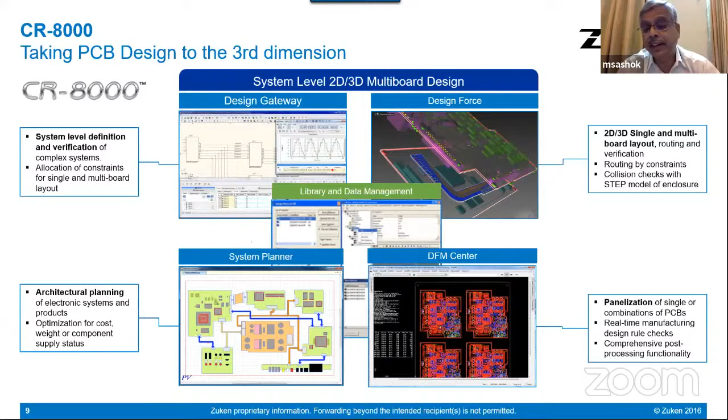So the electrical side family is called the E3 series. E3 series is more from an electrical perspective, interconnect of cables and wires within the system.

Here again, we have the tool giving you the authoring capability to create circuit diagrams, make production documentation, customer documentation, installation and service documents. From the circuit designs, we go into making other views of the schematic, including creating wiring diagrams, which basically says these are the bundles of wires which will go through and therefore form the cables.

Then based on the kind of signals and requirements within the system, you can put in other details to the cable information. To give you a reason why cabling design and wire harness design is very important, I will show you some pictures in the subsequent slides.

Just to bring that into perspective, a typical high-end automobile, for instance if you take BMW 3 Series, if I'm not wrong, if you were to lay out all the wires in the car end to end, you would have close to 5 kilometers of wiring. So you see, this level of wires to be handled necessarily requires a good tool, which allows you to set up a proper schematic and proper layout and do the cabling.

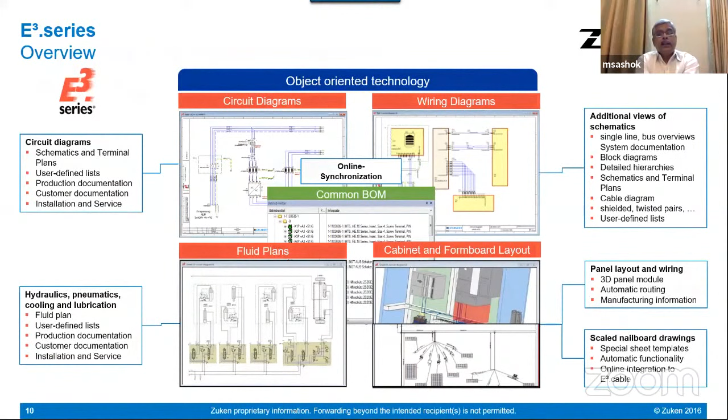And finally, of course, the fact is that there's a lot of data now. When you're doing a design of a product, invariably, if you take automobiles for instance, you go into an automobile showroom and take a look at the model that he has. You go into a Maruti showroom and say, I want to take a look at Alto. And he will say there are 4 variants to the Alto, right? You find yourself with a lot of options and variants.

And so you have petrol, diesel, you have something with additional bells and whistles, like something comes with 6 airbags, the entry model doesn't come with airbags. Obviously with each option and variant, at the back end, a lot of the electrical activity, the electrical connections, and also the PCBs or the ECUs which run inside the car would also be different. And each of them calls for its own set of drawings, its own set of manufacturing information and servicing information, and so on and so forth. Very quickly, any product lands up having enormous amounts of data.

So what we recognized is that good engineering data management is key to a successful way of not only designing and producing, but also managing the life cycle of the product. So we have a solution called DS-2, which in particular for PCB is called DSCR, and for the electrical side it's called DSE3. Here we manage the component library, we manage design data in terms of good version control.

So we at Zuken are focused on providing, or what we say, empowering the designer. Designers, as they keep pushing the boundaries of their design and physical realization of the product, come back and pose the challenges to us.

So there are areas of work which we do that are essentially meant to empower the electrical and electronic engineer. With authoring tools, as we've been going forward over the years, we've seen the form factor of so many elements or systems becoming smaller and smaller. Just take the case of the mobile phone - even going back as late as 3 years ago compared to what you see today, it has seen enormous change in form factor, size, and fit. So there's been a lot of activity in how we provide our tools for authoring.

We have more design domain data management requirements coming up. Today the world works not just in one place - it's geographically spread out. You may be part of a design team sitting here in Bangalore, working along with a team in Pune, connected to a team in China, all managed by somebody sitting in Germany.

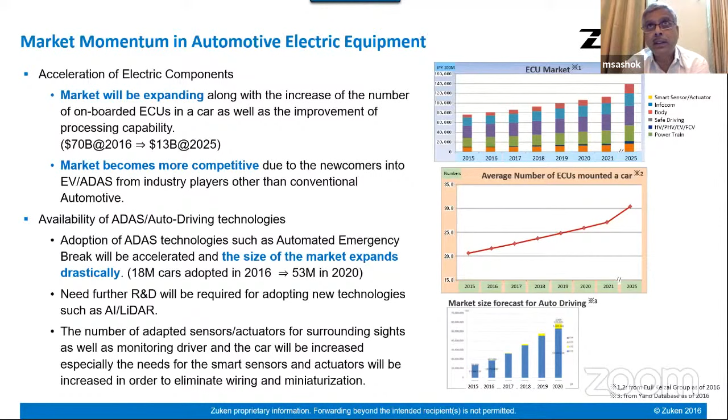As of today, if you see, the EV market itself is very crowded, depending on the size of the vehicle to the electrical mileage range. In the past, there were very few, but today it's already looking like a crowded market, and everybody is still working to improve.

So there is a lot of activity happening on the automotive side, and the most interesting changes are that software companies are becoming car manufacturers. Google has a car project, one of the most well-known projects going on - in fact, they do a lot of work out of India on this car project. So it's not just the standard traditional automotive companies, but other companies who are also actively engaged in automotive, especially the EV boom.

There are some very specific characteristics required for automotive electric equipment. You have a lot of variants. Today's cars are looking at miniaturization and power saving on the platform. There is a lot of focus on safety and reliability, with safety regulations like ISO 26262 bringing in a lot of focus on safety, ensuring the car design is inherently safe. This also requires designers and manufacturers to have traceability and provide evidence that they have designed it well and tested it well.

You might recall that two years ago, Volkswagen got into trouble regarding exhaust emissions. How did they get caught? Because there is a requirement of traceability and evidencing, and somewhere in that process, if you try to cheat the system, you get caught. So the whole process is now being driven worldwide with a lot of focus on safety and reliability with traceability and evidencing.

Also, we are moving towards a lot of automated driving. We have electric vehicles and a lot of focus on autonomous driving vehicles, which brings into focus high-speed designs, both for safety reasons, since we don't want an automatic car to just stop halfway on the road. So there are a lot of requirements for high-speed activities. These are some of the broader characteristics of automotive electric equipment today.

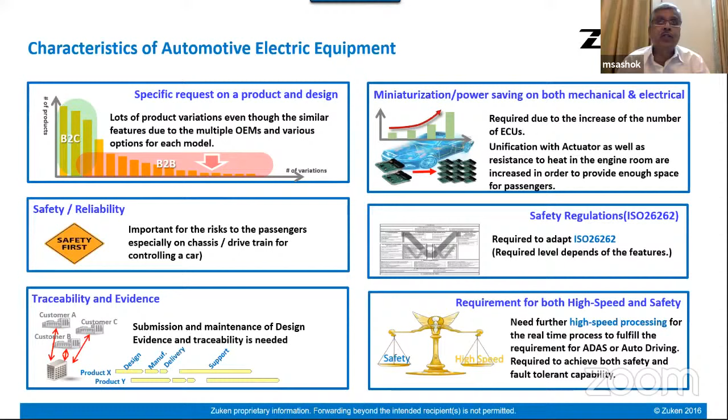I will very quickly place this whole thing in front. There are a lot of design issues which come up from conceptual design, going through circuit, PCB and wiring, creating proto evaluations, and going for mass production. As you can see, the entire concept to realization has a lot of major issues.

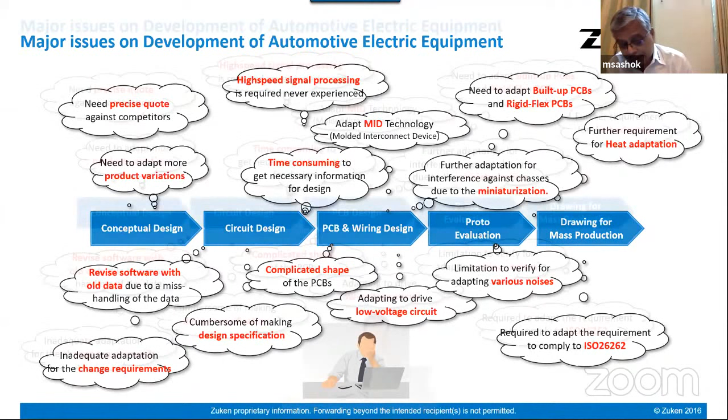In this process, you need to be able to manage the entire approach using a good set of tools. Broadly, this whole landscape can be broken down into three areas. One is everything to do with the design scheme. The other is how you go ahead to design and evaluate different technologies. And finally, data management is very key to the whole aspect of it. These are some of the major issues in development, and Zuken provides solutions for that.

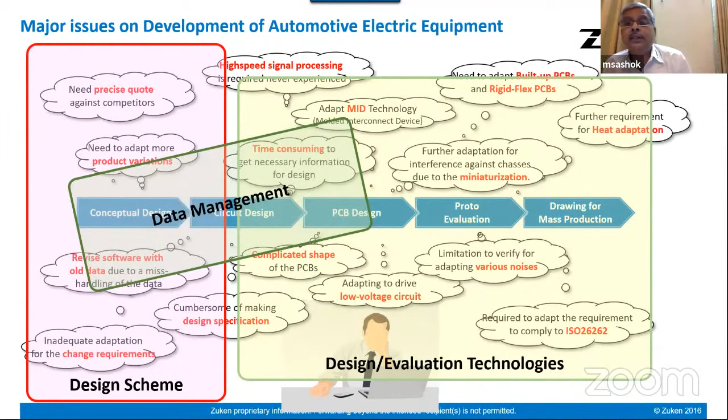Hello, I seem to have lost... No, we're still here. Oh okay, sorry. My screen suddenly went blank. Okay, I'm back, yes, alright.

Not only are there issues related to the electrical and electronic side, but we also have mechanical design challenges, in addition to the electrical electronics. So electromagnetic performance, strength and stiffness, thermal, durability, noise, and gearbox. All these, in sum total, give you the picture of the necessity to have good tools for you to handle the design process.

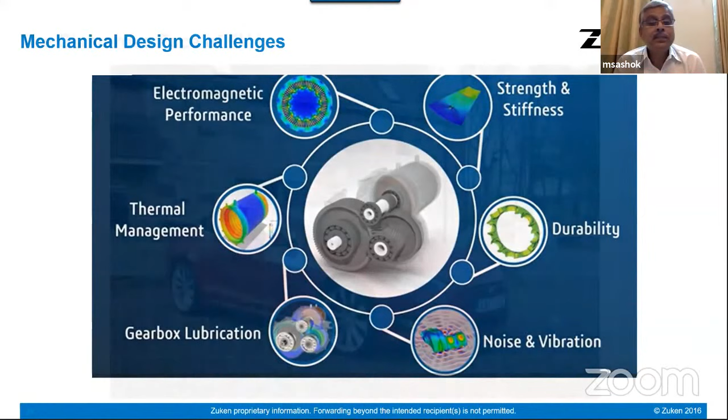To give you another perspective, I'm quite certain everybody recognizes this. This is the most glamorous side of the electric vehicle family - this is the Tesla. I've had the good opportunity to actually sit in it and drive. It's an excellent vehicle and phenomenal engineering. Interestingly, from a perspective of cable and wire harnessing, it looks so sleek and nice.

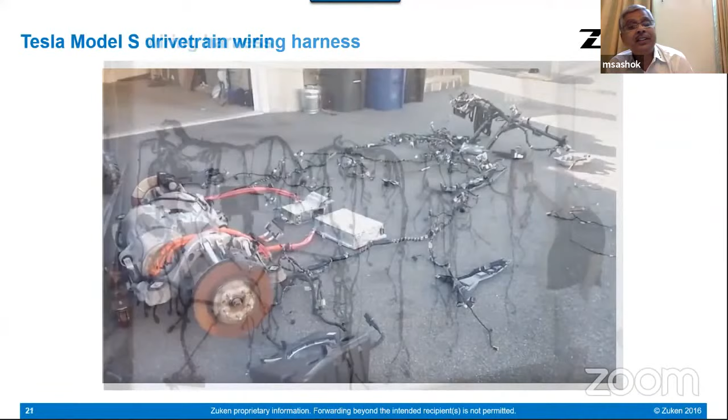If you see the next slide, that shows you the innards of the wiring of the drivetrain for Model S. As you can recognize, what looks so nice and sexy outside, the innards are quite complex. There is a lot of cable and wiring, and it goes all over the vehicle. The next slide will give you another view of the complexity of the Model S wiring harness. So this is the kind of wiring which goes inside a vehicle, and this is Tesla, an electric vehicle.

As you can see, there is a level of complexity involved in not only visualizing this whole wiring system in conjunction with the overall system itself, the mechanicals, but also the entire manner in which you're going to produce this. Don't forget that there are companies who produce a million cars a year of a particular model, and the ability to manage that requires you to use good tools and processes which help you do this accurately, all the time.

All right, so this is where it starts to get interesting. At this point in time, I'd like to hand over to my colleague Ramakrishna, our application engineering manager, who will now take you through how we manage this when we have to design and physically produce a structure like this. So Ramakrishna, over to you.

Yes, thank you very much, sir. Yes, as we move across, we talk about empowering the engineering with Zuken design tools. Could you just turn on your camera, please? It was on, I think. Yeah, the camera is on. We can see you, it's on, right? Yes, confirm. Okay, thank you.

To start with, to automate the harness design flow, these slides explain the entire flow from the electrical drawing to the harness drawing, and finally to the manufacturer for producing the harness.

A typical part may have a top level, a functional or topology drawing, as we see on the left side of a sample car drawing, and a detailed electrical scheme, which constitute the electrical circuit diagrams. From here, once we have those, we move to the 3D environment, any MCAD.

So either we take NX, CATIA, SolidWorks, Creo, Solid Edge—all the standard MCAD software available in the market—so that data can be transferred into the MCAD for mechatronics integration and design. Once we have that data inside the MCAD, we perform other activities, and then using Zuken-specific tools, we automatically create those harness drawings.

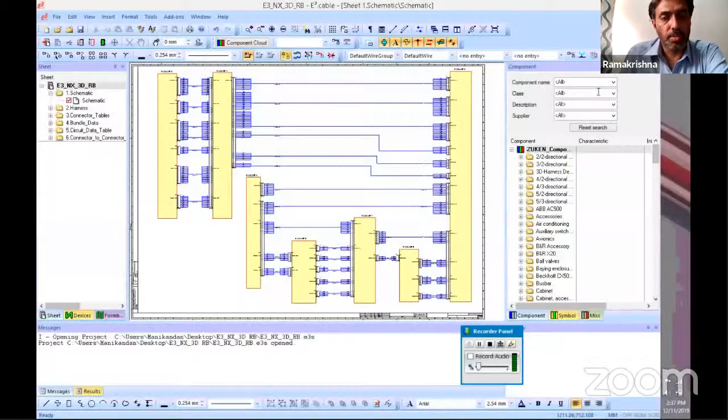So in case if there is any, this is how the electrical software E3 works. We have different types of schematics with lots of interconnections, and I'm talking about bridging the data. So we export the data, selecting the suitable MCAD software available for us.

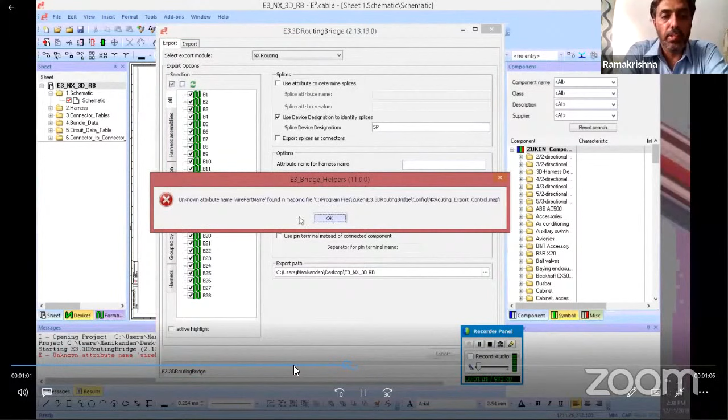Then select this data and export the XML file which goes into the devices. When you use splices, we run through the recognition of the splices in the tool and export the data. The data is exported and the PLM XML file is being created.

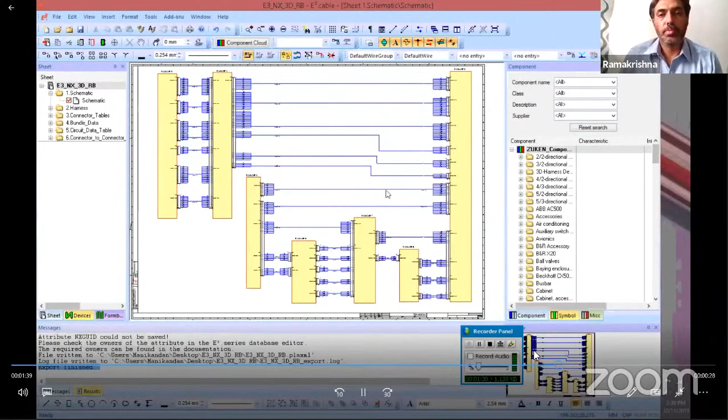So I just wait here by the time it exports the data. Yes, so we have this XML file being exported.

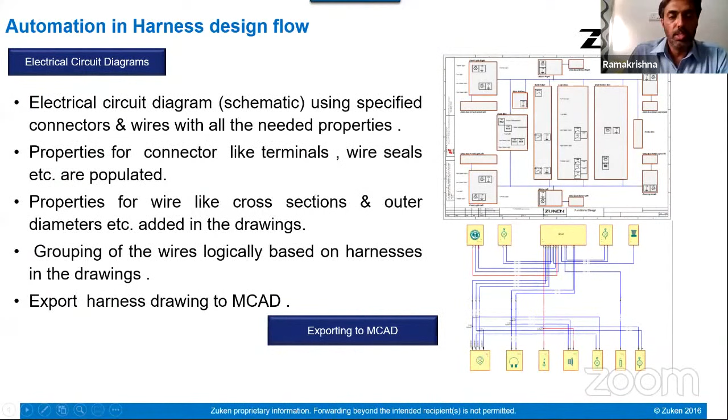So once we have this exported MCAD file into the MCAD tools, we talk about transferring this data for the mechatronics integration. That means we pass the data into the MCAD tool. The XML file prepared, generated from the E3 ECAD tool, is imported into the MCAD.

What all parameters go inside are the connectors, the wires, the cables, the connectivity information. Based on the position of units, the connectors, and parameters like collision, mobile parts, weights, and center of gravity, the routing paths are defined in the MCAD. Once these routing paths are defined, the routing is performed in the MCAD.

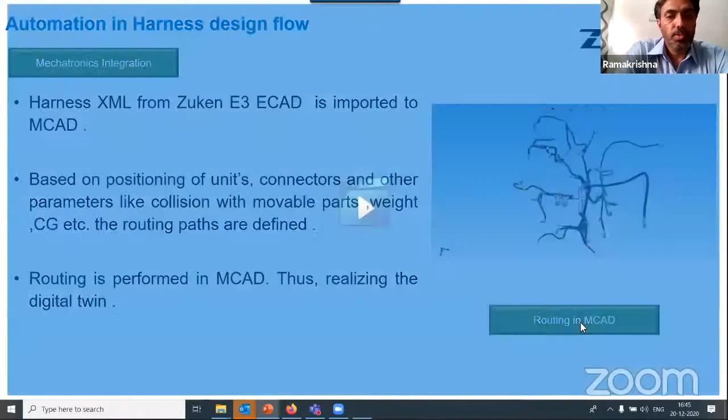So that's what we are going to do, realizing the digital twin over here. I just wish to play a video where we have a specific harness with all those connectors in our tool.

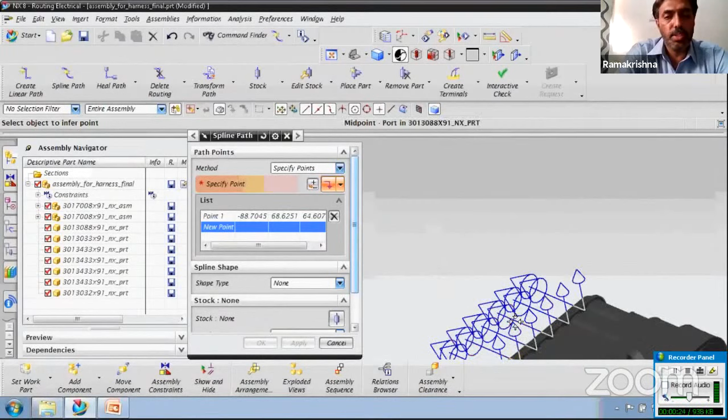So once this is in an MCAD tool in which we are transferred the data XML file, we are further putting on the spline paths or the different parts in which we are going to do the routing points over here. So the routing points are being defined.

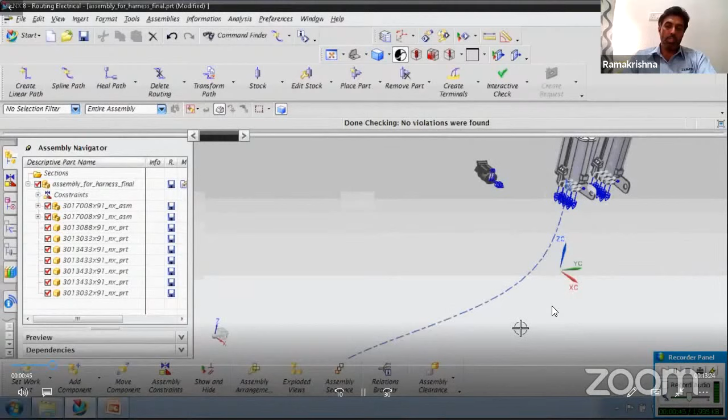So with all the way we wish to do that, and with all those parts and any collisions which we wish to take care of, where routing should not happen in specific areas of the car, all these parameters are considered and provide those routing paths.

Probably, for the ease of this thing, I'll just move through the slides to a faster extent.

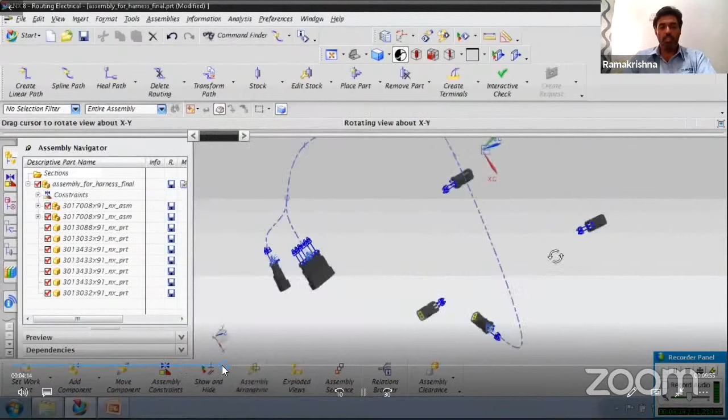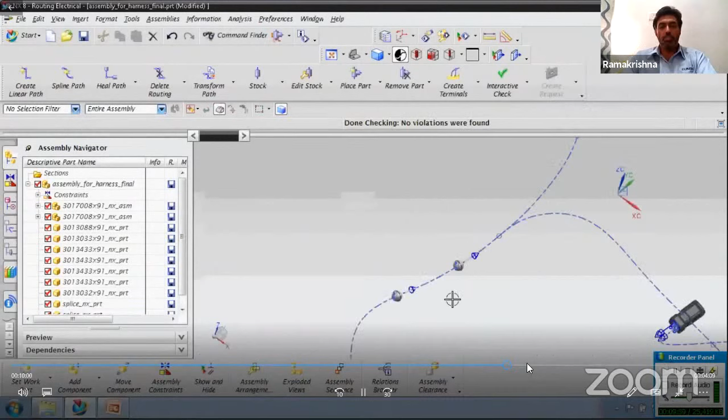So I'm preparing the splices in between. So yes, we have done all the paths defined in our MCAD, and then all this data comes in from the electrical tool, from the XML file. So we are to do...

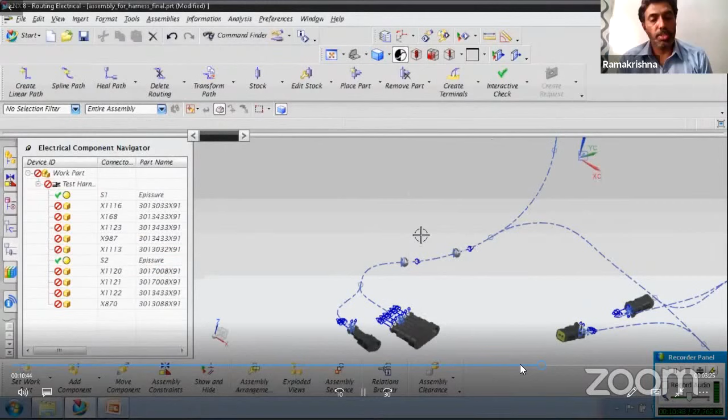probably automatic assign or the manual assignment of the connectors. So all this information flows in from the logical world, that is the electrical world, into the mechanical or physical or 3D world. Once this definition is mapped, either automatic or manual, once that is done...

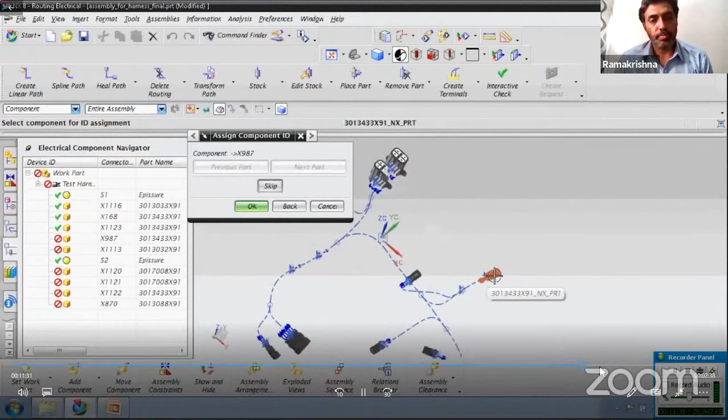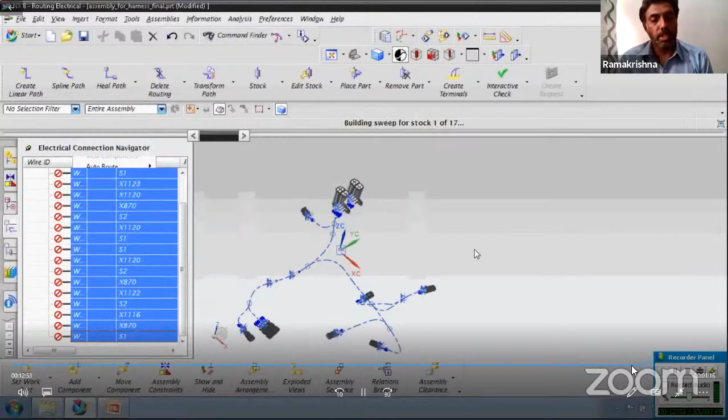Yes, so now we get into, probably each MCAD will have a different methodology of populating the data and working with it, but Zuken electrical tool can transfer to all the MCAD softwares available, and the different XML files are recognized. Here we can see all the wires have been routed, and the routed structures can be seen here with all those connectivity information which has flown in as an XML file into the MCAD, and see the wires within the bundles over here.

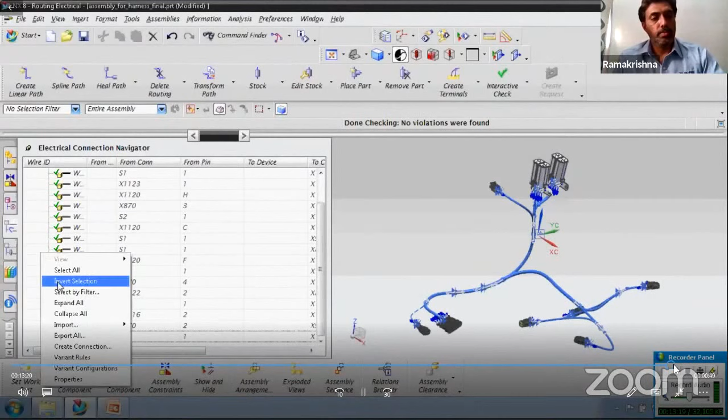Yes, in case we need it, we can export it to the electrical back. So this is what we perform in the mechanical tool by laying the spline paths and performing the routing of the wires within the system. Once we do this, now the 3D world is done.

So now we wish to make the form boards or the harness drawings, and pass it to the manufacturers for the drawing. So we have the 3D structures in the MCAD tool, the mechanical tool, and now what we do is import the harness drawings, and here we automatically create those harnesses in Zuken.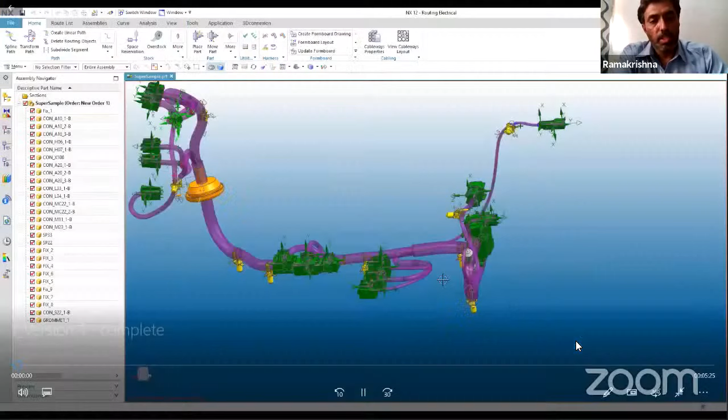So once we have the 3D routing of this one, now I'm going to play a video of how we are going to perform the flattened 2D harness drawing.

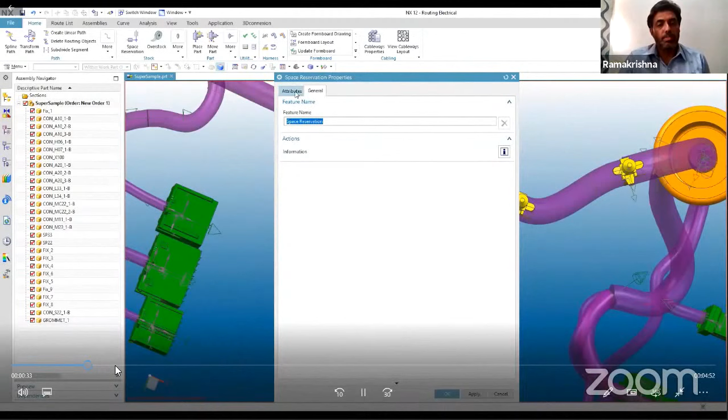So this is an MCAD tool.

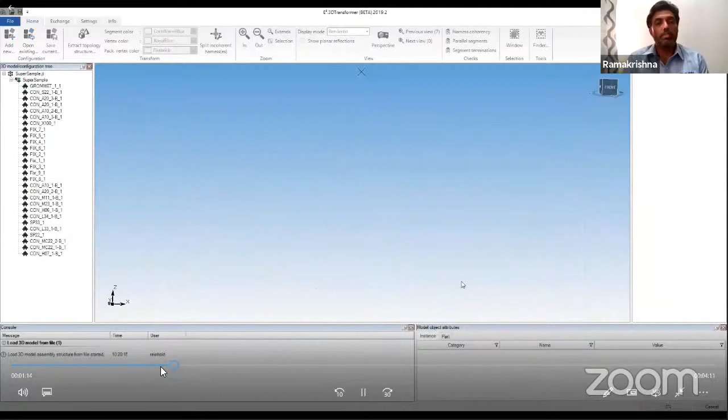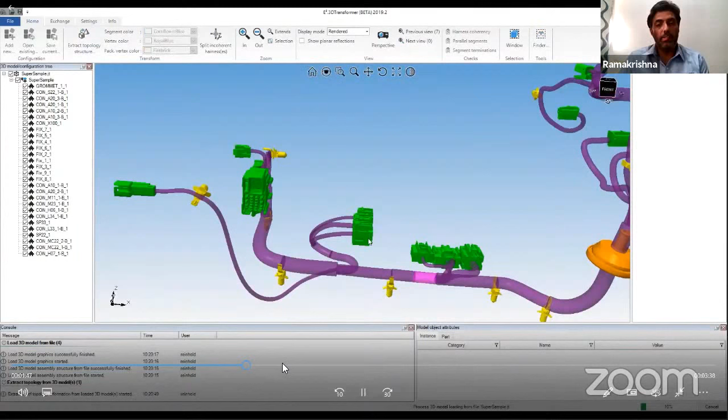So we have picking up this 3D structure, the routing structure, picking up the 3D routing structure. Once I pick up the 3D structure over here, we have all the connectors and all the wires. All the connectors which are available in the 3D, we can see all these structures, all those terminals, and we extract the 3D structure out from the MCAD.

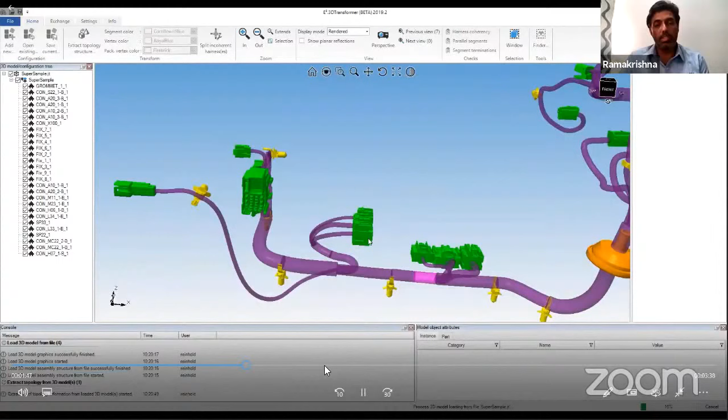Here we call it a transformer. Once the topology is extracted, having the 3D structure over here, we can see all those. So now still what we see is a 3D structure. Now we do all the required selections of the main harness branch, and now we have a flattened 2D structure which is available. And this is taken into the ECAD tool, from the MCAD tool.

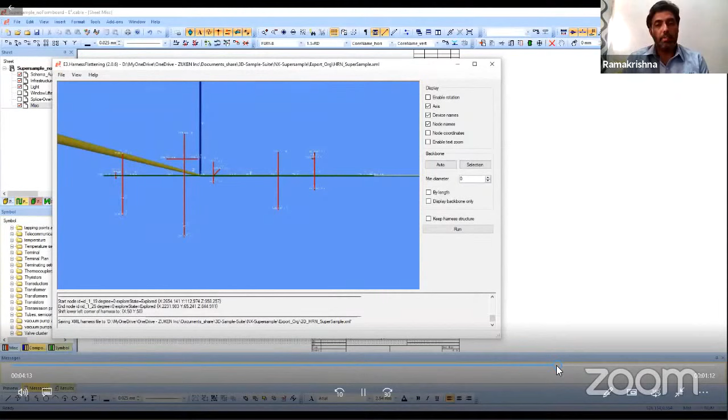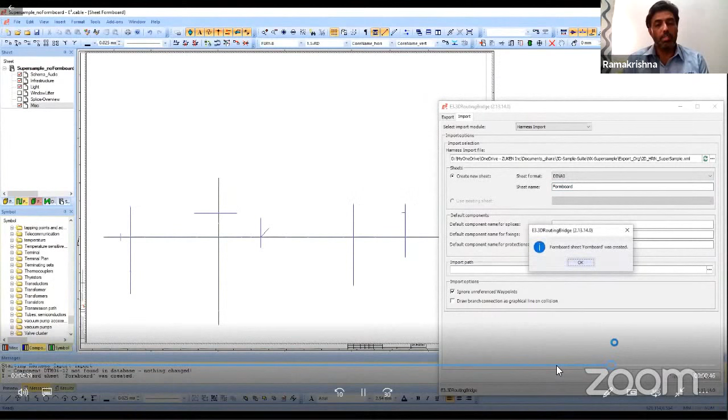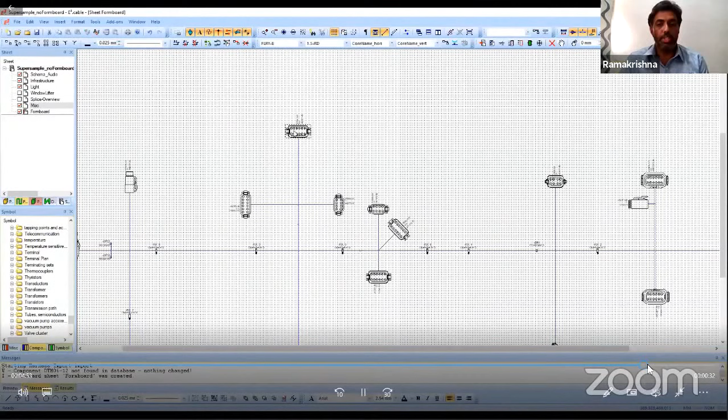So here I'm going to import it. Here my form board is getting created. So form board is nothing but a nail board of a 1:1 harness or a scaled harness. So now my 3D structure has become a 2D flattened structure. This 2D flattened structure is now additionally populated with further details like the connector tables, wires or other things. Here I can do certain rotation of the segments and other things suitable for manufacturing.

Yes, so the tables have been populated.

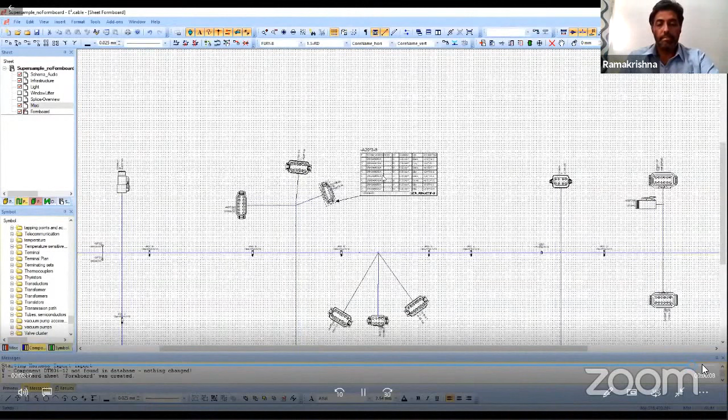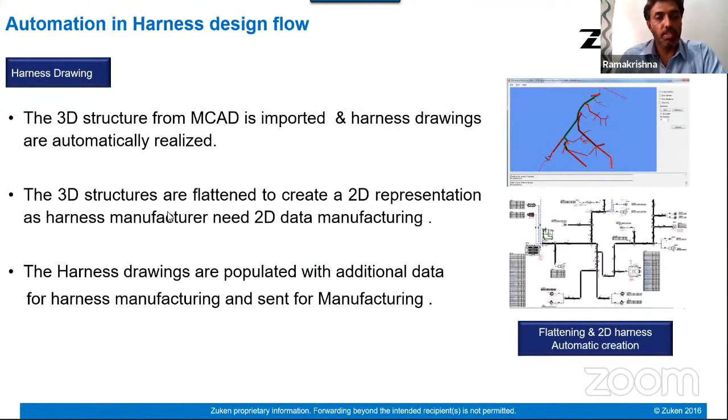Once the form boards or harness drawings are done, what we send to the manufacturer for each specific harness is the bill of material and the wire cutting information. When we do the wire cutting, we may use certain extra lengths, like for a twisted pair - when two wires are twisted we get extra lengths of wire. Those extra lengths, and also when using connectors, we want those extra insertion lengths. All these additional parameters are considered, and we generate a bill of material and the wire cutting information.

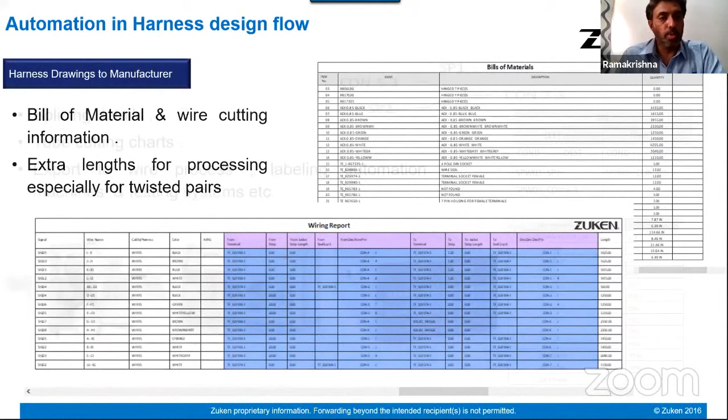Further to this information, we also provide splicing information. We have specific splices where probably two wires are coming in and one wire is going out, done for splicing the ground and the power. So we give the manufacturer the information that two wires are coming in and one wire is going out of the splice. We can see a report here, left and right, showing how my conductor is coming and where it is going. So we send this data to the manufacturer.

And maybe we are using specific tubes, like a corrugated tube, and specific taping which is done - all this plus the labeling information is given to the manufacturer. We also export for cases where specific manufacturers' machines are used - exporting different formats of data like the labeling system, the wire processing system, and the testing system, all readable by the machine's specific format.

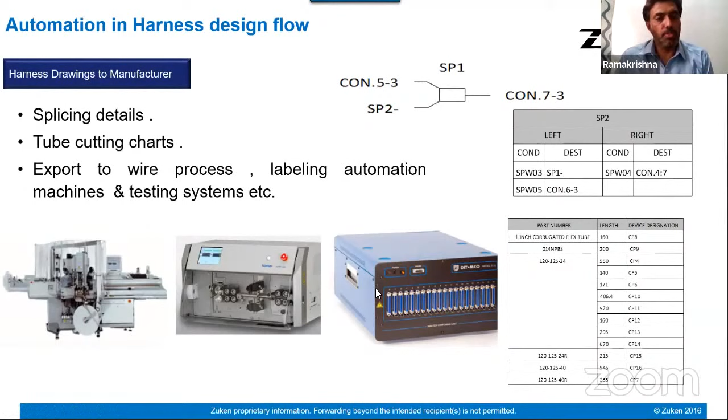So, to come back to my first slide as a recap point: we do the electrical circuit diagram using Zuken E3, 3D Bridge transfer to all the mechanical software whichever is used, get the 3D structure, do the flattening, create the form board flattened 2D view, and give the data to the harness manufacturer. This completes the flow from the electric circuit diagram to the manufacturer.

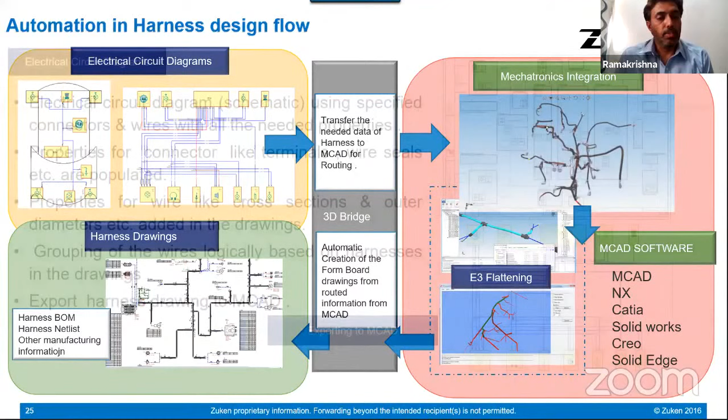Coming to the last point and the summary: automotive designs are becoming more and more complex as we have a lot of sensors and other additional things coming in. This is also resulting in complex harness drawings and complex harnesses, and there is lots of safety and performance considerations as part of the design activities now. Hence we need an automation process right from design to manufacturing, which helps avoid critical failures, ensures early verification and early performance checks so we can avoid problems encountered later. Zuken's tool set, whatever we've seen from the PCB and electrical tools, helps automate the above process, thus empowering design engineers right from the design process to the manufacturing.

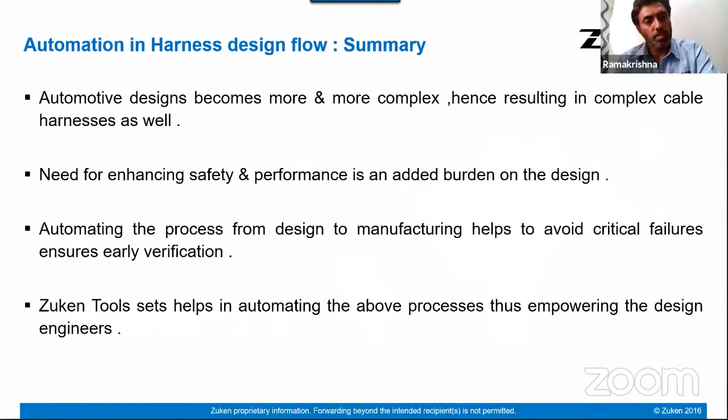I have to pull out one line that Ashok made during the presentation. He said good engineering management is key to the success of the life cycle of the project, and it was great how you explained how Zuken's products also assist in this area.

At this point we'll open the Q&A session. Ashok has already started answering some questions on the stream. There was one question from Abhishek: is it possible to import schematic and PCB models from other software, for example KiCad, into CR8000? Ashok responded that KiCad is what we call a point solution, whereas CR8000 is an enterprise tool. So the short answer is no, not direct out of the box, but there are workarounds to manage data transfer between different PCB tools.

We have a question from Shubham Singh: can we make PCB schematics in CR8000 and convert it into Gerber files for printing? I believe Ashok responded that Gerber files are a standard output.